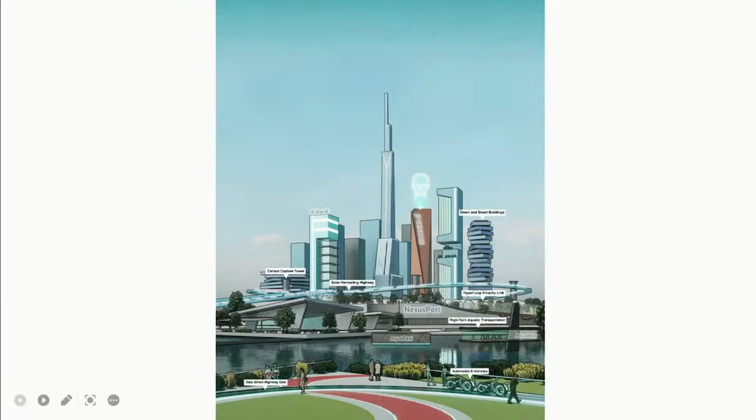Hi, good morning. My name is Jack, and I'm from UTAR, currently in my final semester of my undergraduate studies. Today I would like to present to you my idea, my vision of the future city itself. I gave my vision a name, called ASEAN Nexus, a floating city on sea, constructed mainly upon two main pillar ideas: the first is how it would operate as a city with futuristic technologies that solve today's problems.

The city itself is envisioned to float on water, mainly because of phenomena like rising sea levels. Big cities like Venice, Virginia, Shanghai, or even closer ones like Jakarta or Ho Chi Minh City are bound to sink below the rising sea level and disappear within the next few decades. The city itself would be constructed out of modular floating pods, and when combined together, they could form any size, even up to the size of a floating city, with any architecture happening upon or even below it.

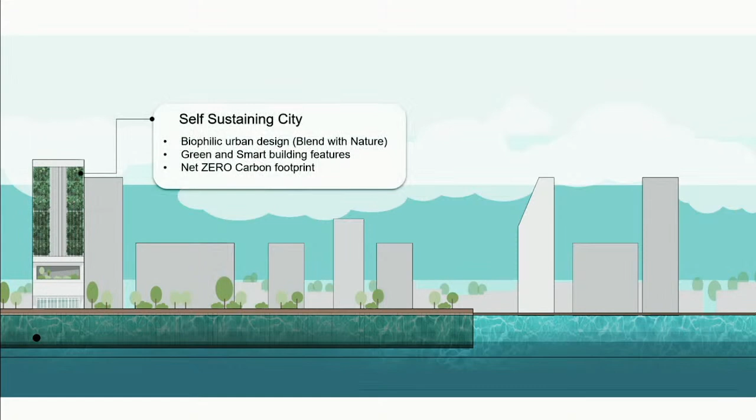The city itself would also be self-sustaining with biophilic urban design, and all the buildings will be integrated with green and smart building features. All the architecture will be not just net zero carbon, but also able to harvest rainwater, harvest solar energy, and even help purify the air pollution that we have today.

And speaking of air pollution, the city itself would also have carbon filtering towers which help lower down carbon levels. As we all know, even if we start planting the maximum number of trees today, it will still not be sufficient to combat the air pollution that we have now. Therefore, there will be these carbon filtering towers at the peaks of the city itself.

Combined with the air purifying system of the buildings, this may be one of few ways that we can slow down the global warming process.

The next big change will be electrical AI self-driving vehicles, which will all be solar or electrical powered, releasing less to no carbon emissions. Future roads and highways can be imagined as massive circuit boards where not just electrical energy but also data is transferred between the road and the vehicles, so the AI or the vehicles themselves can use the energy for traffic control.

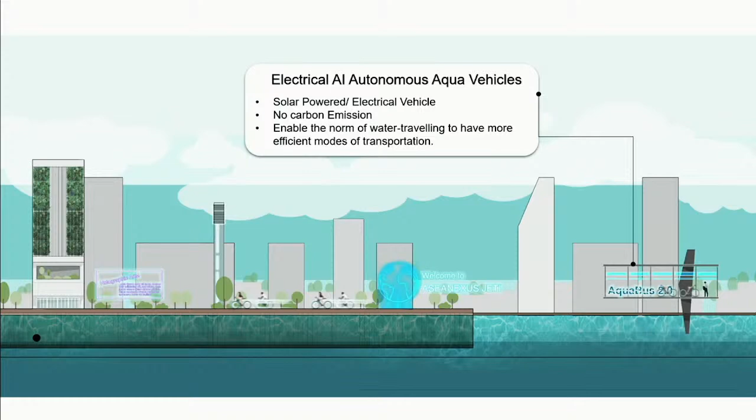The highways can also be integrated with solar panels to help harvest solar energy. The same can be said for water transport, where it will be improved to the point where it can be used as an efficient mode of transportation for the floating city itself.

Lastly is a Hyperloop system. This can be understood as the future improved MRT system, but working within a vacuum tube with less to no air friction inside, enabling maximum traveling speeds. We can use this to interlink the capital cities of each country, which brings us to my second main pillar concept of ASEAN Nexus, which is connectivity.

Industry 4.0 is witnessed through the fusion of technology and human, in which by technology I mean robotics, AI, electronics, or even cloud systems. All these blur the boundaries between our physical, digital, and biological worlds. Therefore, it is always the intangible aspects of our history, culture, and our feelings and emotions which really connects us back to what makes us human.

ASEAN Nexus, the name literally meaning the central of ASEAN. It was first envisioned to be the central trade hub for the ASEAN nations, but now it is a free city, not governed by any of the ASEAN nations. Rather, all of us share equal responsibility in growing and maintaining the city itself.

ASEAN Nexus was soon to be the showcase of our tropical climate to the world, in which the districts around it will help showcase the context and culture of the nearby land of the Malayan district, Indochina, Philippine, Borneo, and Indonesian district. All these districts will help break down the geographical limitations of countries.

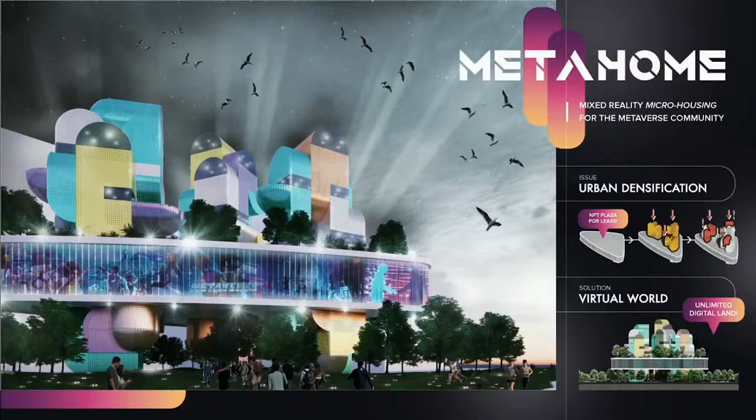So for this project, I've delved into the issue of urban densification. There are constraints in the physical world, so what if I can propose a non-physical solution to it?

People say sky is the limit, but I would say virtual world is the limit. The lack of physical spaces in densely populated urban areas could be potentially compensated by the unlimited land that we can find on the virtual land.

So the aim of the project is to nurture the consensus of phygital architecture while escalating its sustainable physical realization as a prototype, as an urban core that would realize in the physical world.

So I proudly present to you the Meta Home, the mixed reality micro-housing for the Metaverse community. Utilizing blockchain technology, the users are free to customize and personalize their own modular units.

For instance, outdoor terraces for seniors living, natural daylighting workspace for entrepreneurs, etc. So the designs are reviewed online by the owner himself before translating into a physical asset.

Also, the Meta Home is equipped with the flexibility for future expandability. The Meta Home has the capability to cater to the changing needs of the users at different ages with different desires and different demands.

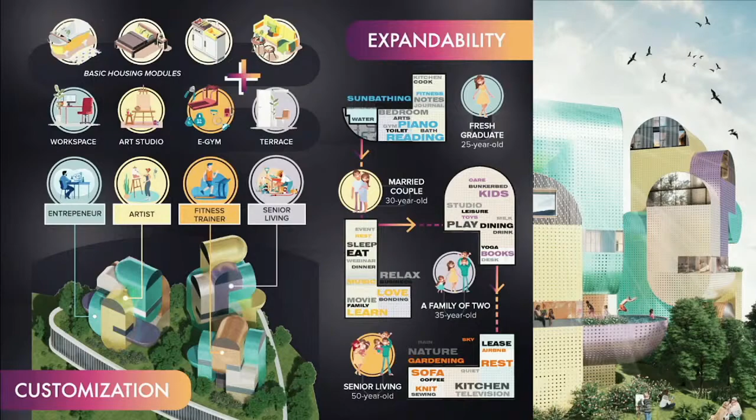Again, I believe that cities shouldn't happen to people. People should be involved in the creation. So in the Meta Home, micro-housing will no longer be stacked in repetition. It will be expressive with the highlight of collective creativity of the community living here.

So everything we do online today, connecting socially, meetings, Zoom, everything, entertainment, is going to be more vivid and immersive. This is what Meta Home is working towards, the social presence. The reality presence is the key to feel connected in the Metaverse.

There are diverse digital amenities provided in the Meta Home, the NFT Plaza, the DeFi Arena, and so on. And also, many companies have already taken a step ahead to launch their products in the Metaverse platform.

For example, the cosmetic company NARS has already launched a makeup NFT campaign, and also Decentraland, a virtual 3D world where people can buy and sell digital real estate, hosted the world's first ever Decentraland Metaverse Marathon.

So I believe that it has the ultimate potential to unlock a massively greater creative digital economy.

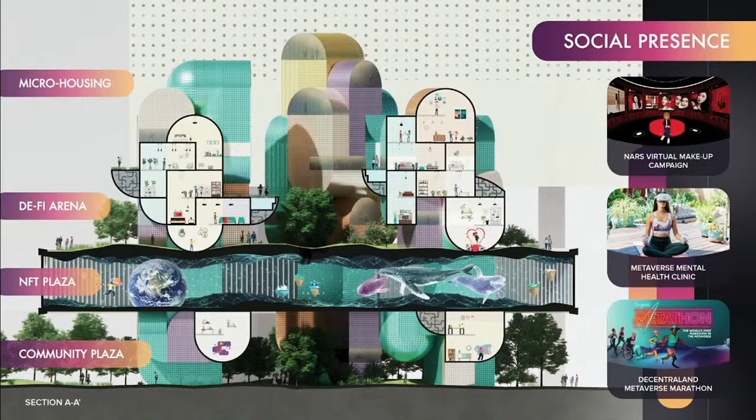How do I play the video? Yes, okay.

So I imagine Meta Home as a vivid lifelikeliness. It is personified, and also it's breathing in its significance of social responses. It's envisioned as a prototype that will replicate in different areas at different cities where city lives intensify. It is infused with social responsibility.

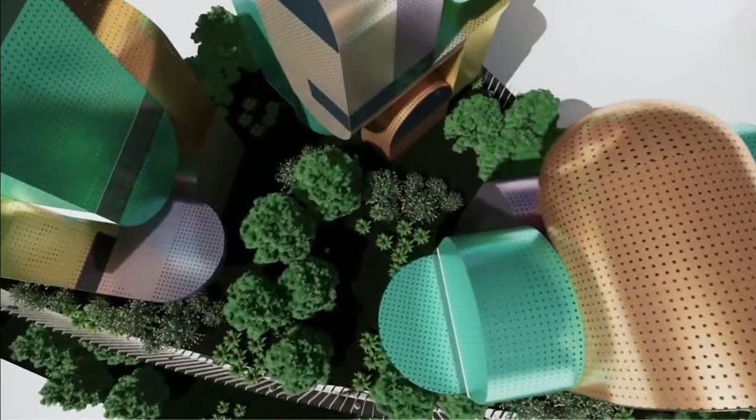As a social agent that will showcase to the world what a Meta Home is and the infinite possibility that Meta Home is endowed with. Meta comes from the Greek word beyond, and future city is beyond what we can imagine. So I would say, step forward, step beyond the Meta Home, the beginning of the next chapter of the future city. With this, thank you.

Thank you. Wow, this is so exciting. I don't think I can do a video presentation like that with my skill. Wow, generation now is so different.

Right, so for the judges, Architect Carol Lee, I think you're ready. Yeah, go ahead. I'm already excited to ask questions because of the ambitious vision that you have. Congratulations.

Thank you. I do think it's amazing that you have the metaverse in mind. My question is this: I saw that you highlighted mental health, and I'm glad you did, that mental health is one of the things you pay attention to addressing. But what about the physical health? Because in the metaverse, it's virtual. The challenge is, how do you become the architect of the physical world in a virtual world? Meaning, how do you facilitate things like sun, nature, oxygen density, which you can only have in the physical world, but how do you facilitate that in the virtual world to enable physical health?

So again, this ties back to the physical issue I mentioned earlier, the scarcity of land in the physical world. The reason why I propose micro housing is to address the lack of land in the physical world. So my proposal would be, within that small 30 square meter of micro housing, what I can propose is the virtual reality gives them the space. For example, some clients might have sickness or mental issues with small and congested spaces, so virtual reality is giving them other options to have, let's say, a high ceiling.

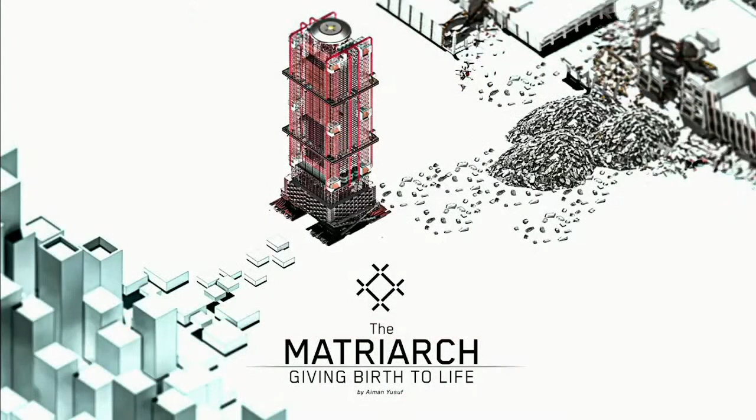As I woke up in the morning last year, I watched my smartphone and saw the news. There were so many catastrophic events happening at that time: the Tonga volcanic eruption, super typhoon in the Philippines, the Sumatra earthquake, even the current Ukrainian-Russian conflict. I noticed one thing appeared, which is the aftermath that resulted in catastrophic debris such as metals, woods, plastics, even cement, that somehow grows within these disastrous areas. So we begin to ponder that these things are not seen as valuable resources, but as an old saying goes, another man's trash is another man's treasure.

So I begin to ponder whether this can become a valuable resource, as stated by Neri Oxman, an architect, saying that the future of architecture is the materials that surround us. She says that by 2050, wastage on our earth will expand by 60%. So this calls for new ways to look at this debris as a new dimension, and to help those rebuild their lives or what they lost based on the remnants of the events.

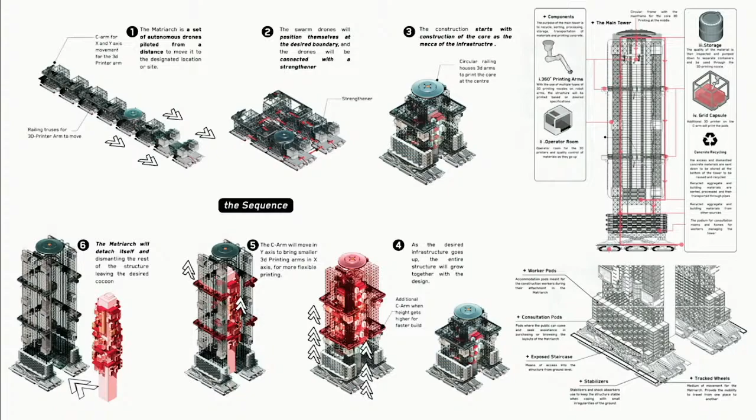Then the Matriarchs will start to build and install another C-arm for the x-axis to build, as the circular motion will go for the x-axis. So it starts to build at the desired height, and during the fifth stage, the resident will inhabit the constructed building as the construction completes. But during the last stage, the Matriarch will release the building, as if a mother giving birth to life.

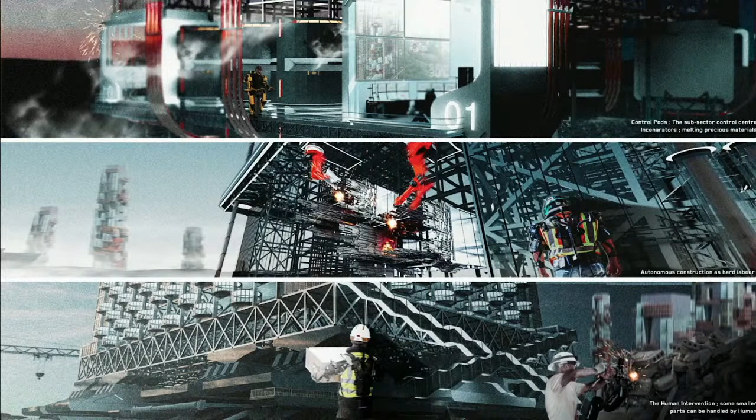With the coming age of big data and artificial intelligence becoming machine learning, we are moving towards singularity with AI as the alpha decision maker, and us as the controller, the omega decision maker, deciding what's best for our suitable environment. The first image illustrates that the future operator will only operate and manage the Matriarch and the integrity of the designs. The second image illustrates how robotics and autonomous systems become the hard labor, while we just look and decide what's best during the process. The third image shows human intervention, that we shall cope together with the AI and the machines. This begins to make us ponder the future of human and machine integrity together.

So we will decide the future of humanity. As architects and future designers, we ask: even by 2100, will we see a self-sustaining, self-regenerating city that contributes to our own life? We will become the guideline, and we ourselves will live together amongst the machines. So where the Matriarchs go, there will be life. I will end my slides and my speech here with a video that we shall ponder and wonder about the future together.

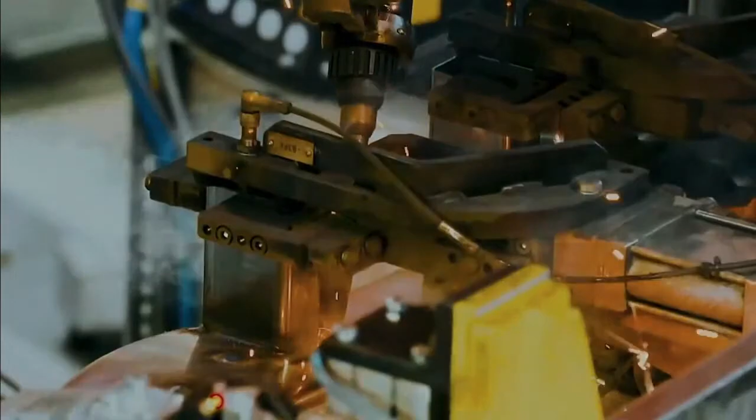With that, I end my presentation. Thank you.

Firdaus, you really bring us to your future, and somehow or other, we become scared. Because this is one prediction saying that if people never realize how to take care of our nature, especially Mother Earth, this thing could happen. Everything is being polluted. And this is another angle - well, this is not like a studio crit session, because this is Architalent. That's why I consider this your talent to bring us to the future, especially to the theme of future city. I have to give you thumbs up, well done, thank you.

Congratulations. I am very impressed by your proposition, and while it is set in the future, I find it very doable. So congratulations, thank you.

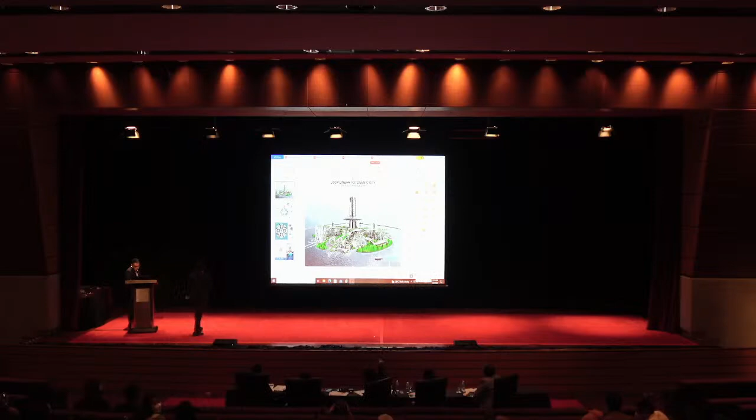Cannot work. Kid, you handle the PowerPoint or behind? This one? Oh, okay. Yes, it. I think we have a technical glitch here, right?

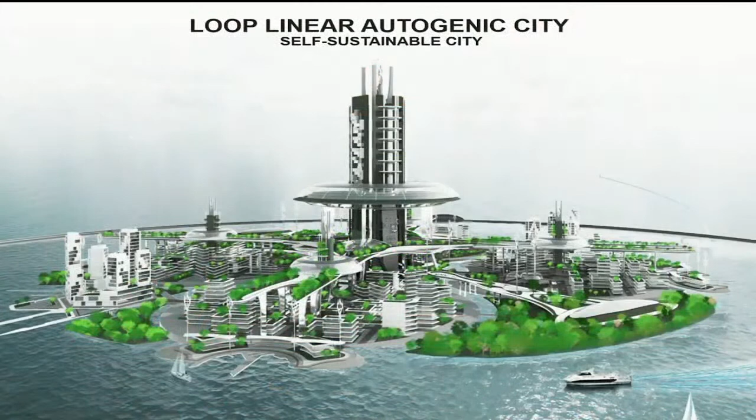What I imagine in the loop linear autogenic city is actually a floating city that utilizes renewable resource energy, and then it powers up the entire city. So the loop linear autogenic city is actually to counter the issue of rising sea level and also the rapid urbanization within the coastal area. And then what I'm trying to do is create man-made ecosystems that can benefit human beings.

So in terms of the master plan concept, there's a grid city and a linear city applied for flexibility in expanding in the future, and then there's a loop city element that gives flexibility in terms of neighborhood or citizen roaming, looping in the city. Another issue that I want to mention is the traffic issue, which is a major issue we're facing now, and that's why the loop linear autogenic city is all about.

It's a looping city. There's an elevated multi-level electrical circulation, which you can see there. There's an electric car that will roam into the district, and on top of that there's a hyperloop train that will bring you from the district to the downtown of the city. From the downtown city, there's a passenger drone that will bring you up on top of the city, vertically circulating, and you can see that the service drone will serve as monitoring the entire city in terms of security and all the facilities.

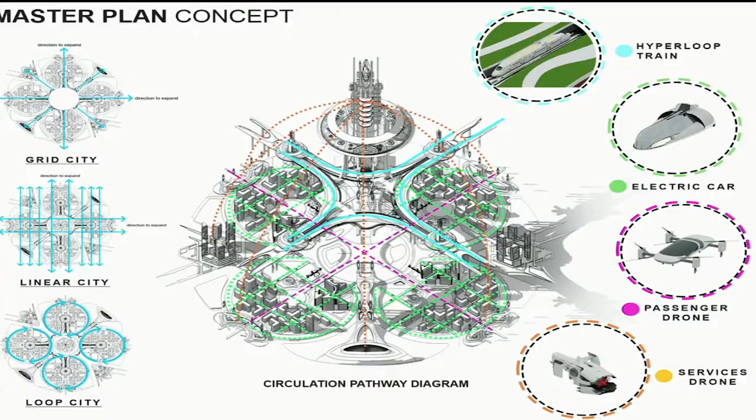So what I'm trying to aim for is free flow circulation, with minimum intersection between the roads, so that we can utilize the transportation better, given the limitation on renewable energy. Okay, next.

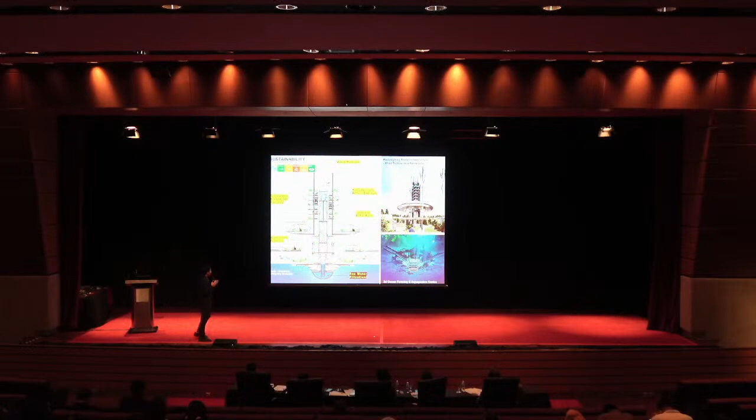Another thing I want to highlight is the main idea of sustainability. This image shows the core of the entire city. This core will power up the entire city. The sea filter will manipulate natural elements into clean energy through seawater filtration. We will filter and store it for various uses, and on the other side there's a waterfall — the seawater becomes a man-made waterfall, and through the waterfall elements, we can generate electricity.

Another component is the concave BIPV roofs, and at the top of the development, wind turbines take advantage of the ocean's wind velocity. Next, I will play the video.

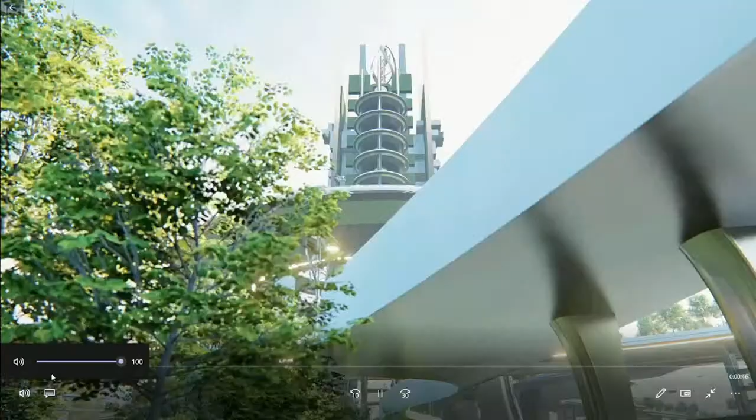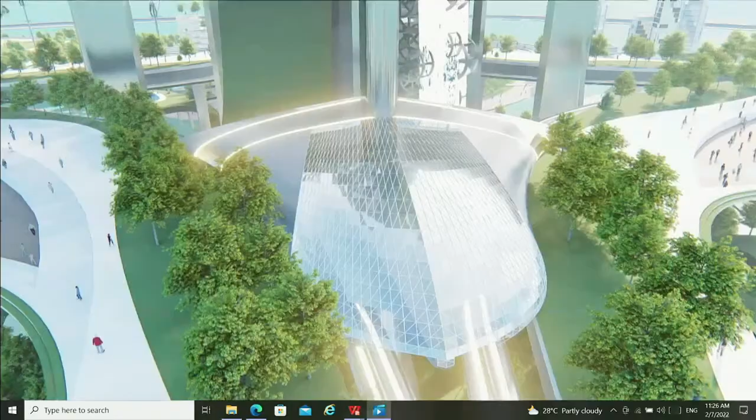The city is aiming for future extension. The Hyperloop station will connect all the city, so all facilities will be connected by the Hyperloop station. At the edges of every district and the city, there's a public ramp for citizens to roam, and the district tower acts as a connection between the Hyperloop station from the center to every district.

This one is about the waterfall wheels. Yeah, this can be modular, and it will be explained in the future. Thank you, that's all.

Thank you, Firdaus from USM. Yes judges, I would love to live in your city. Yeah, I can do it with lesser traffic jams. Yeah, and waterfalls — that's what we aim about.

It's a beautiful city, and also a beautiful presentation. I really appreciate the diagrams and visuals you've brought for the audience to enjoy. I have only one thing — you talk a lot about interconnectivity, and that's really efficient, very systematic. I like your master planning, where you have linear, grid, and looping. So what about the water vehicles? Is that part of your master plan?

Yeah, it's also part of the design. I saw some renders, yeah. It would be more interesting if their daily life also revolves around the water vehicles as well. Can I go back to the slide? Yeah, sure, okay.

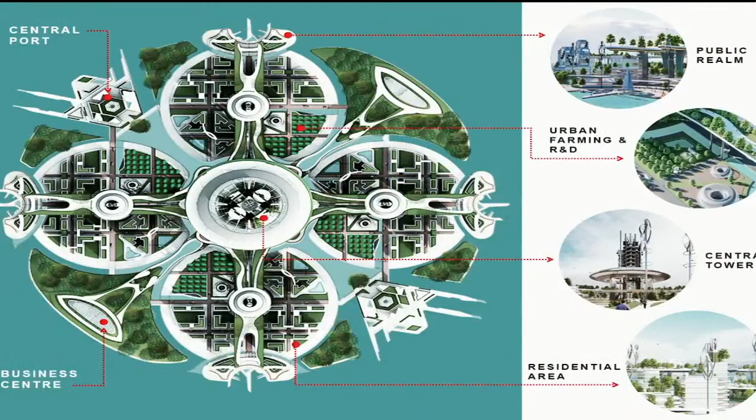As you can see, there's a port and business center at the top edges. If the modular city will expand, there are two ways connecting the entire city — one is the Hyperloop station, the railway, and the second is the central port. This one is for maritime transportation.

Firdaus, congratulations. Yeah, thank you. I like your presentation, very good.

My general assessment of your work is that it is very utopian, but you have greatly considered the natural environment, which is highly commendable, because in the future, even in the most futuristic way, we should not forget the environment. So congratulations. Thank you.

Hi Firdaus, again I want to congratulate you. Very, very good presentation, and I think you captured even the master planning aspects, like what Architect Carol mentioned in terms of master planning. My question is, are you building this at the sea, or are we just building it? Oh, suddenly it's 'we'.

Or are you building it just after the coastline, expanding the current Peninsula Malaysia? So it's reducing due to the sea. Are you then supplementing it back with these modules? To answer that, it can be anywhere as long as it's sea, but the depth has to be reasonable to build that.

You can listen to the cries for help - they are dying to be revitalized and to be functional again. Hence, the concept for my proposal is symbiosis, a mutual relationship between different organisms, old and new, past and future. Such a concept is to highlight and bring the green elements all the way to the rooftop of the building. It wraps around the building all the way to the rooftop, bringing active circulation and a multitude of green spaces to help the occupants and the local neighborhoods.

And the green spine is also able to captivate and cultivate its own ecosystem where you can grow your own food, have good landscaping at each level, hit the gym, and be able to work at the same place. Being in the post-pandemic phase, it somehow makes me realize the importance of living and working at the same place.

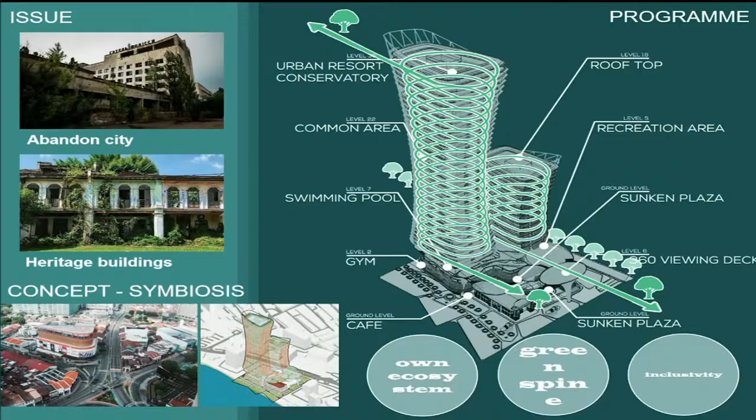So next is the city heartbeat. It actually makes me redefine this concept where the scheme acts as a heartbeat, where it beats, grows, cultivates and revitalizes all those existing buildings surrounding it. It's like a ripple effect that helps uplift and bring all those kinds of buildings all the way to this scheme.

Okay, moving on to the perspective on my right-hand side is the xylem pod, one of the innovations proposed along the coastline. It gives out cooling breeze, the same concept as the cooling slab system to help with the thermal comfort of users, and a cluster of them exponentially increases the cooling potential and reduces the heat island effect. The second image is the facade of the podium, inclusive of both LED and BIPV panels.

Other than generating revenue from advertisement, they can also generate their own electricity. A bit to the left-hand side is a parametric structure made from fiberglass reinforced concrete to hold the glass panels, and this whole system is like a funnel that collects and channels rainwater for irrigation purposes. This whole sustainable ecosystem tower is to influence and make change for the betterment of the future. Next, I will show a presentation video of mine.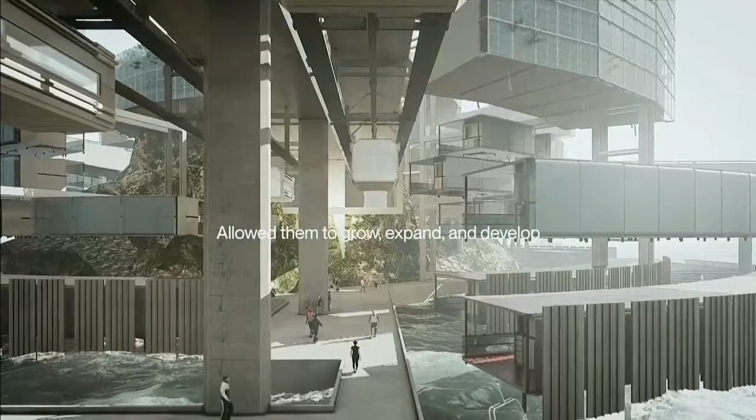Thank you, everyone. I would like to introduce myself. I am Rizky Rivaldi from Universitas Indonesia, and I would like to present my design, called Harbourage of Hope.

I am calling out the issue about creating the future city. It is about the phenomenon of refugee migration, and about refugees getting to several countries or big cities for their growth and development life.

I take the sample of Hong Kong. Hong Kong is a big city with 6,000 people per square kilometer. So in some ways Hong Kong has a lack of space and a problem to develop their future city. Refugees often get citizenship rejection from the mainland, and the mainland has another problem too, that it's a highly dense populated city. How can it be solved?

I'm responding to this issue by forming an outside stone reef for the wall, and finding an unimaginable place for the building I built, to expand the human potential for the lack of spaces. In the massing process, I took up...

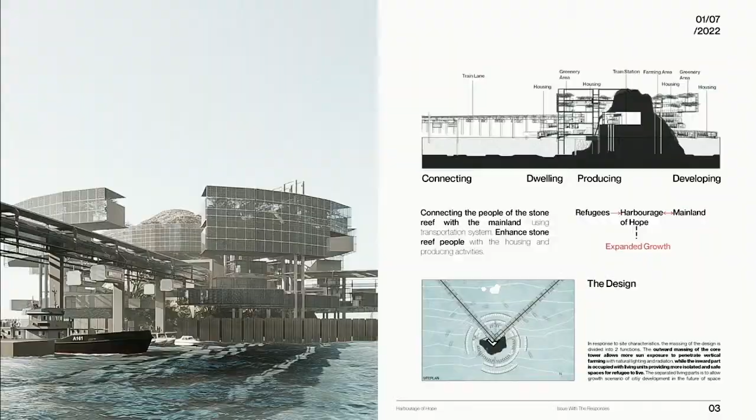This is the model, and I split it into several programs. The first one is the greenery area. The greenery area is an aspect of building sustainability and becomes a food supply output from the building. The greenery area also has rainwater harvesting for its water supply needs.

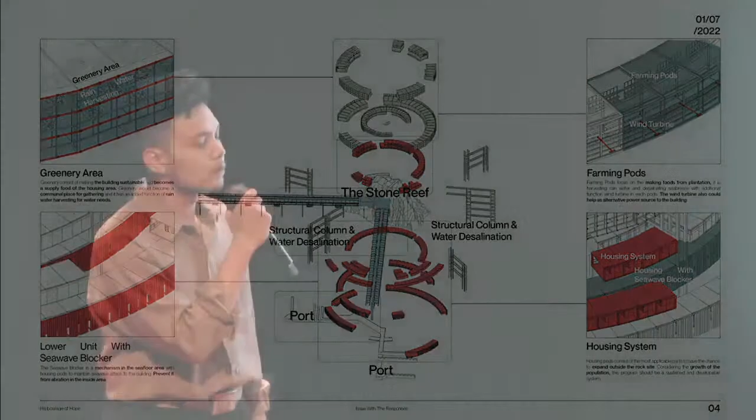The next one is farming pods, which is about making food for supply. The farming pods have a wind turbine for electricity needs.

The next one is the housing system, which, as I said before, has a growing system of housing units, with the lower unit having a seawave blocker.

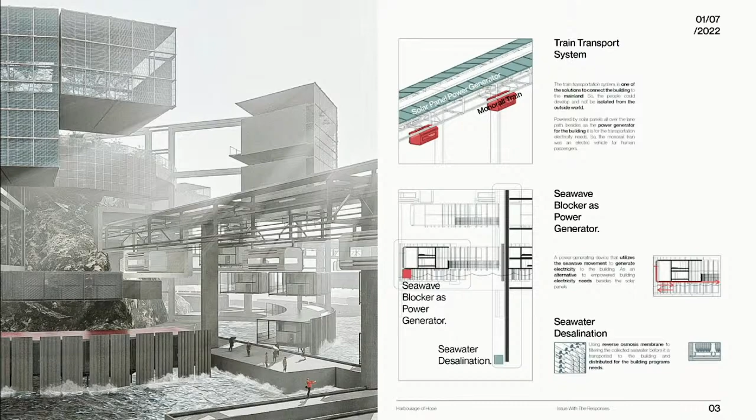The next one is the transport system, which becomes the connector between the refugees and the mainland. The transport system is powered by solar panels.

The next one is the sea wave blocker as a power generator, which utilizes the sea wave movement to generate alternative power for the building. The seawater desalination supplies freshwater needs, using a reverse osmosis membrane to filter seawater and fulfill the building's program needs.

Okay, thank you all. That's all for my presentation. Assalamualaikum warahmatullahi wabarakatuh.

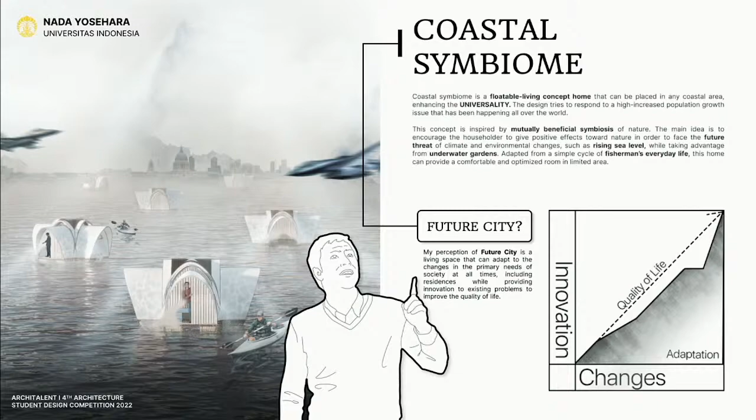Before I go to the issue and statement, I want to share my perception about the future city. As you can see in the pictures, there are two words I want to highlight: innovation and changes. These two words collaboratively will improve and increase the quality of life.

Then there is one more important thing: within the process there is adaptation. So for me, the future city is when the design can adapt to changes and give its best innovations to face the future.

From the issue of population growth, today the explosion of building erection vertically as a solution for uncontrollable population growth is no longer an effective way, due to it having a limit, while population growth currently still increases.

So the statement is: we must realize that a site is not only about the ground and stone, but a site includes the oceans. So why don't we try to transform vertical living into horizontal living?

Based on data, the surface covered by oceans on Earth takes 70%, which means we have a big possibility to transform vertical into horizontal living, since it has unlimited living space.

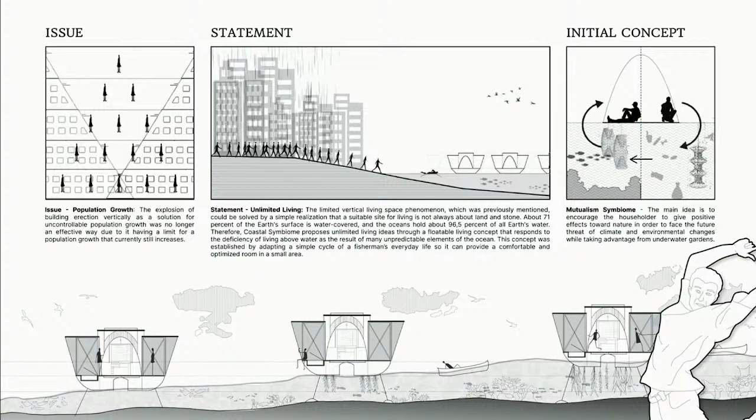The initial concept I propose is mutualism symbiome, and the main idea is to encourage the householder to give positive effects towards nature in order to face the future threat of climate and environmental changes, while taking advantage from the underwater gardens.

So we not only take advantage from the oceans, we must also give positive effects to the oceans. That's why it's called symbiosis mutualism.

For the digital shape expression, I utilized digital shape exploration scripting, producing several digital shape explorations, and I decided to choose the cross-shaped form, which I think best fits the five design goals I obtained.

The first goal is reflecting fisherman's dwelling humility, second is seamless compact geometry, third is balanced weight for stability, fourth is centered spatial organization, and fifth is grouping crossing between living and surfaces.

Once we finally decided on the final form, I imagined how it could be transformed into the urban context. This design allows your own preference, meaning it has its best modularity.

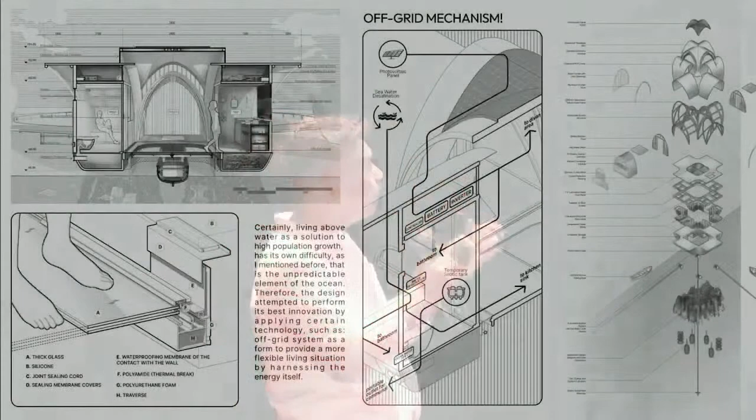Also above the boat, I implement a transparent floor that may allow the householder to see the underwater garden that I designed.

Since this design is far separated from the mainland, I implement an off-grid mechanism where the main power comes from the photovoltaic panel, harnessing energy from the sun.

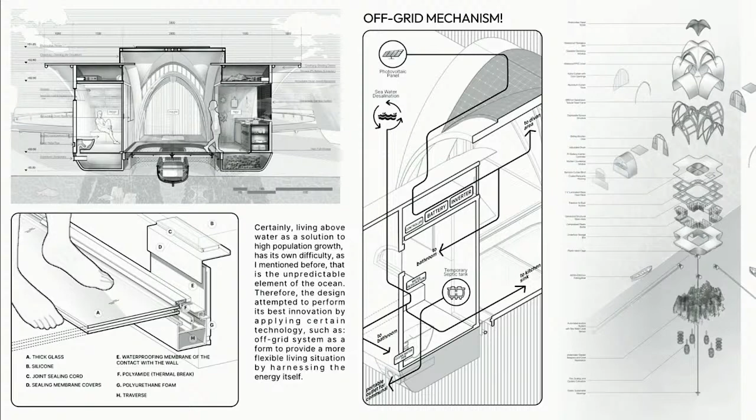This is the process of the off-grid mechanism, and there are several technologies that support it.

For the conclusion, with the presence of this design, it is hoped that you will no longer be afraid to face unpredictable future threats, because all problems have been answered through the innovation that I provide. Therefore, this design will be one of the top solutions in facing the future, especially the rising sea level threat.

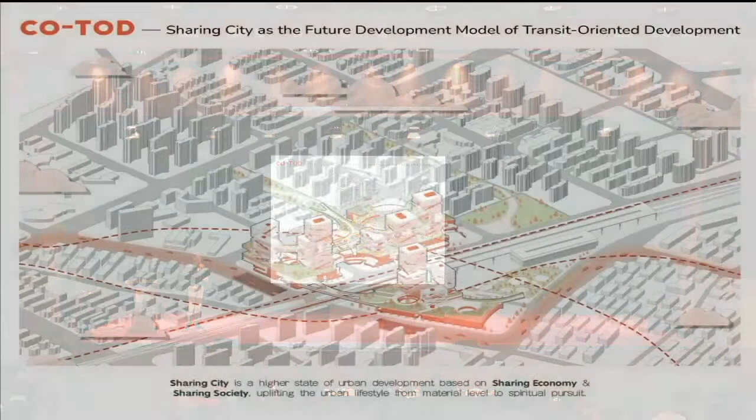Good morning. My imagination of a future city is a city with flexible, borderless living and working. This can be achieved with the idea of sharing city. Sharing city is a higher state of urban development based on sharing economy and sharing society, where people aim for quality experience of using instant services when needed rather than owning something that will only be used at certain times. To achieve this, a city has to fulfill 3 fundamental criteria.

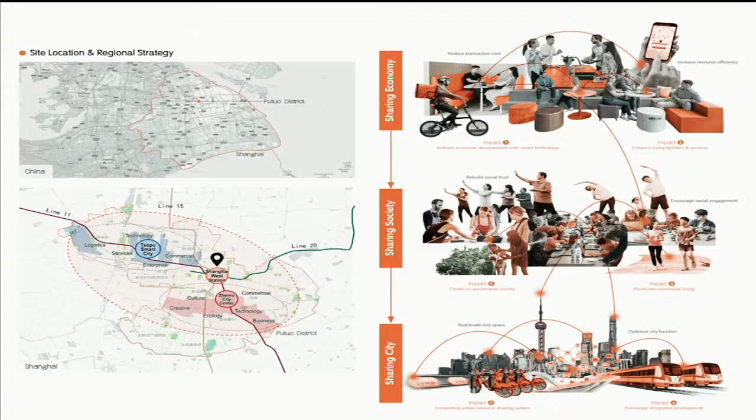My site is located at Shanghai West Station in Putuo District, between Taopu Smart City and Zhenru City Center. The future development plan of Taopu and Zhenru will introduce numerous resources in innovative technology and modern commerce, fulfilling 2 of the criteria of a sharing city: high-level development of productivity and matured application of intelligent technology. To achieve the 3rd criteria - normalizing the culture of sharing - I propose Co-TOD at Shanghai West Station, a transit-oriented development project with the idea of sharing city.

Sharing is a model embraced in China due to the dense population and limited resources. Sharing economies such as e-commerce, co-living, co-working, and online platforms utilize smart technology to boost economic development and improve living facilities and services. When more people are used to the sharing platform, a sharing society will be formed where people take care of and manage their community together and adapt into a communal lifestyle. When more people adapt into this sharing lifestyle, a sharing city will be formed with a comprehensive urban resource sharing system.

So I studied different levels of sharing, from city scale to building scale. Firstly, sharing between cities by creating connection between Taopu and Zhenru, forming a technological corridor through the vehicular road and railway system, connecting both cities to Shanghai West Station. Shanghai West Station, which is my site, will facilitate the exchange between both cities by providing flexible living and working areas. To further enhance the connection between the cities, I propose a transport system for sharing between people and goods.

The railway coaches can be swapped between passenger coach and goods coach depending on peak hour and non-peak hour, using a capsule pipeline to deliver parcels directly to and from the mall, co-living and co-working spaces.

Next, the scheme is also shared with the surrounding community. The activity created within the scheme can benefit and improve the life quality of the surrounding neighborhood by providing spaces for leisure, cultural, sports and daily needs. An underground interchange ring is also created with a roof garden to connect the northern and southern areas of the site, which is currently disconnected by the railway track.

Thirdly, between different building blocks, there's also sharing between programs. Co-living and co-working towers are built along the railway station with an experiential mall to supply the daily needs of residents. However, co-living, co-working, and experiential mall all share certain similar functions such as event space and leisure space, and this activity can stimulate one another and activate the urban space. So I create an urban core with multipurpose atrium that connects underground spaces and upper level spaces, and also provides linkage with shared facilities among different programs.

Lastly, within each building block, there is also sharing between functions by creating multifunctional combinations and blurring the boundary in between to encourage interaction, and also providing space-time flexible usage.

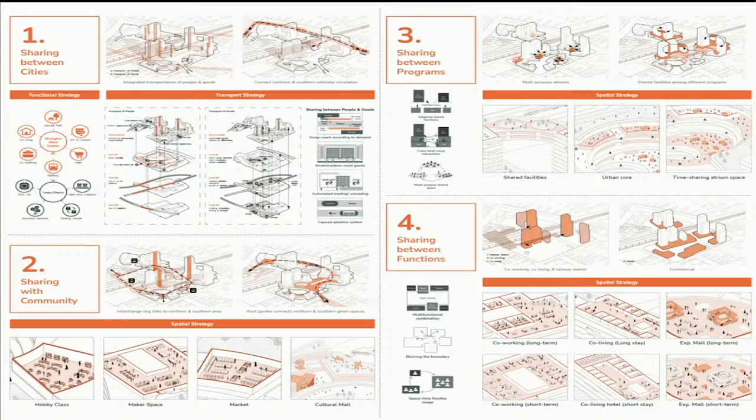So co-living, co-working, and experiential mall can all be rented long-term or short-term depending on the user. Different levels of sharing all work together to create a sharing city that is viable for different scales of users.

For on-site residents, they will be staying long-term. The co-working space, co-living space, and link bridge with shared facilities create a sharing lifestyle that allows them to enjoy greater experience and lower cost.

As for the surrounding community, they can participate in the makerspace of co-working, the hobby class of co-living, the community market along the mall, and the cultural mall transformed from the heritage building. All of these are connected to the roof garden, which is accessible to the public.

As for visitors from other cities, the scheme provides them a flexible and temporary office working space and accommodation, and also an underground mall as soon as they arrive at the railway station.

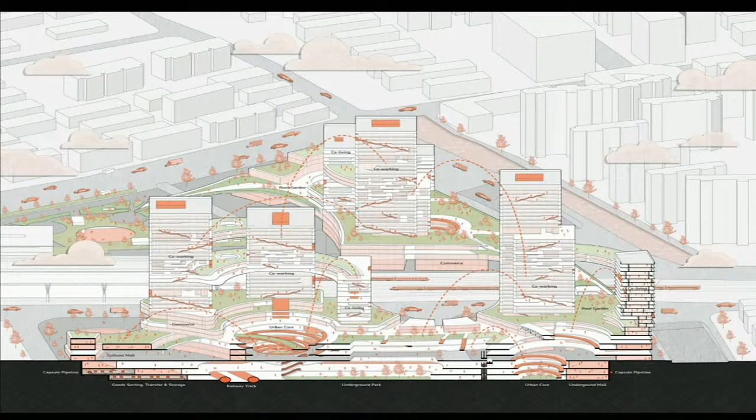To sum up, from higher to lower levels, people share working and living space, facilities, the recreational park, public transportation, and the delivery system. So the railway interchange station is always well connected to other cities.

Hence, the idea of a sharing city can be implemented here using the already available resources. In this scheme, people do not need to own a car, a house, or work at a fixed location anymore, but still be able to enjoy a great experience of quality services whenever and wherever they want. Thank you.

Zianlun, congratulations, you bring me to Shanghai now. So is this your first international session? I'm actually from Malaysia, just studying there. So this is your first time presenting at an international level? Yes. Congratulations, you have done a good job here. You know what I mean? So I'll leave the design comments to others, but for me, you show that you have experience working in China. And then you come here—are you working in China now? No, studying in China. Okay, then I hope you can work there and bring back to Malaysia and share with all future architects here what your experience in China is. I wish you all the best, and I'm so proud of you. Congratulations.

Zien Lun, right? Yes. I really think that 5 minutes is just not enough. I felt that you could go on, there's so much to unpack in this holistic scheme. Even looking at this picture alone, I'm still digesting the many things you have put into it. It's a very complex yet comprehensive approach to your design, and I really enjoy just looking at this—it's like a piece of art too. So I do think this is very feasible, very practical, and very organized. I love it, that's all, I have no questions for you. Thank you.

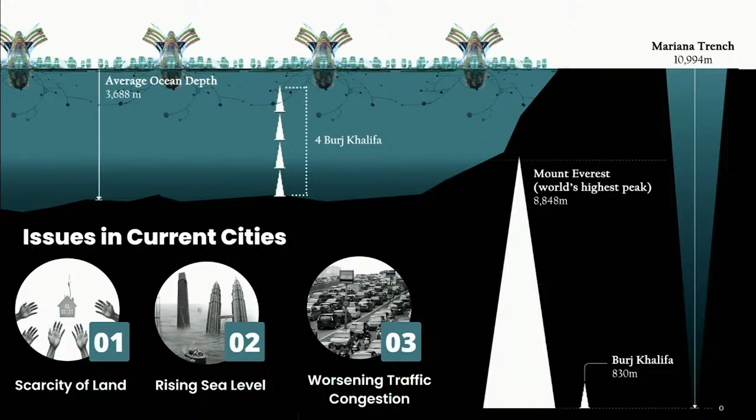Imagine how tremendous the spaces we could create if we explore ocean architecture. This certainly solves the issue that happens in every city, the scarcity of land. Next, the design concept of my aquascraper scheme is the hyperlink city, where the city center acts as the heart of the aquascraper modules, surrounded by sub-cities, and finally the perimeter residential belt. Each module is connected by the hyperlink to form a series of floating cities. This decentralized, or scattered city center concept, brings numerous benefits: it maintains land prices, reduces commute time, and makes Aqua City a walkable community, bringing all facilities to your doorstep.

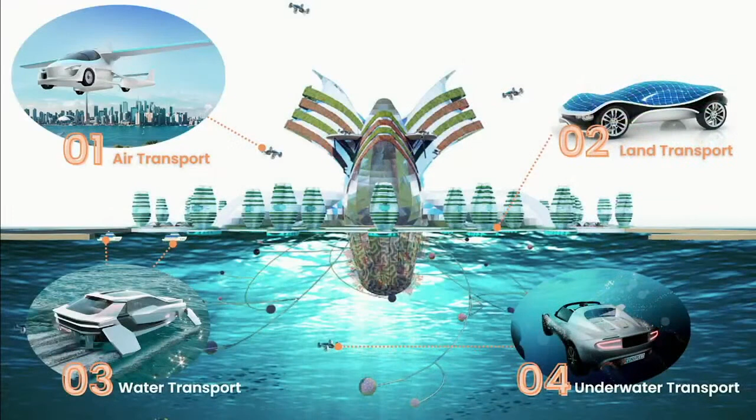The Aqua City provides 4 layers of transportation: the air layer conquered by flying cars, solar-powered green self-driving cars on roads, futuristic high-speed water buses on the water, and finally humans realizing the dream of commuting underwater with submersible vehicles. Now let's enjoy the animation.

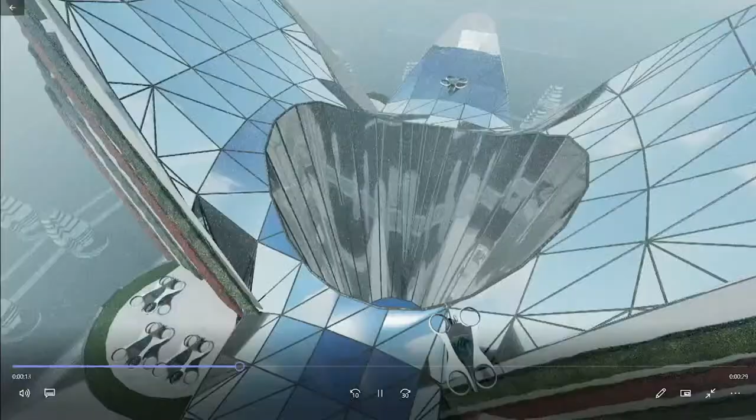Allow me to walk you through this self-sustained city where floating solar farms are proposed in every module to power the city. The central atrium will harvest both rainwater and daylight down to the structures under the sea. Vertical farming is proposed to enable food independence in every one of these aquascraper modules.

Moving down to the sea, tentacle-like structures convert the kinetic energy of the water current into electricity. And let's not forget our future neighbors, the marine ecosystem, where artificial coral reef facades are installed to revitalize the marine ecosystem. That's all from me, and I guess now you're excited to move into this aquascraper. Thank you.

Yiling, wow, you make our day. I hope CIS can start to appoint you as a good presenter. Datuk Vincent is here — thank you, Datuk, welcome. I'm so proud of you because you managed to present so well. I need to declare the verbal presentation full marks, because the way you narrated, your design — I think this is the point that convinces your lecturers, convinces your clients in future. Very good, and the way you made your presentation informative with illustration — well done. I wish you all the best in the future, you are truly, truly potential. All the best, thank you everyone.

Look at my design strategy, which makes use of urban public space, building, transit and transportation, sustainable water, waste, and energy. All this strategy helps me study my urban planning in terms of having an industrial site here.

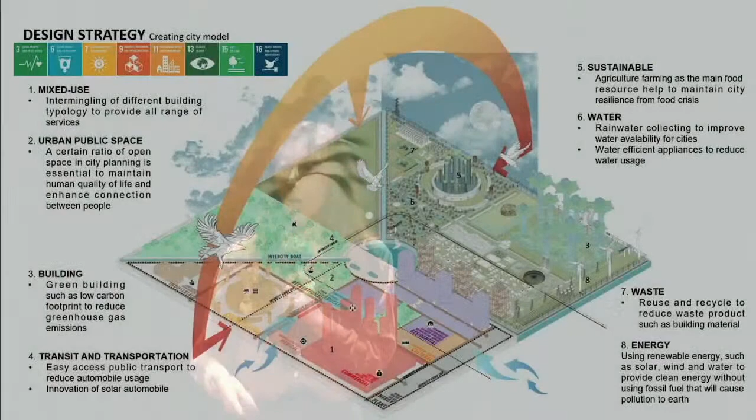Ranging from industrial site, medical, government institutional building, housing such as landed housing as well as high-rise tower, as well as commercial - I have shop lots, shopping mall, as well as office tower - and finally, culture and urban space.

Perhaps we can look at the video to show my imagination view - a hero image within the city area, and an isometric diagram to show my design idea in 6 different locations.

For the residential tower, I'm looking at a link bridge for community engagement, modular housing units, and flexibility for assembly, as well as an office tower with accessible green roof space.

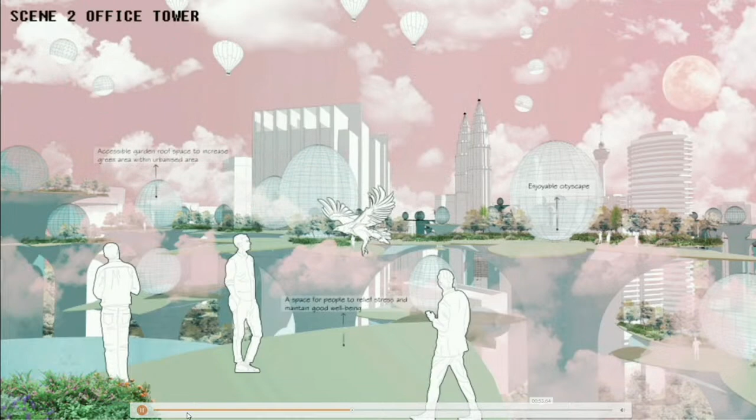A pavilion encouraging social interaction as well as increased income. A riding cable car, from here you can see that the nature area and man-made structures are in balance, as well as urban parking space. I have a rainwater collection system for rainwater absorption and an automobile-free pedestrian walkway. Finally, a mobile classroom, free to assemble, integrated education, and encouraging outdoor classrooms.

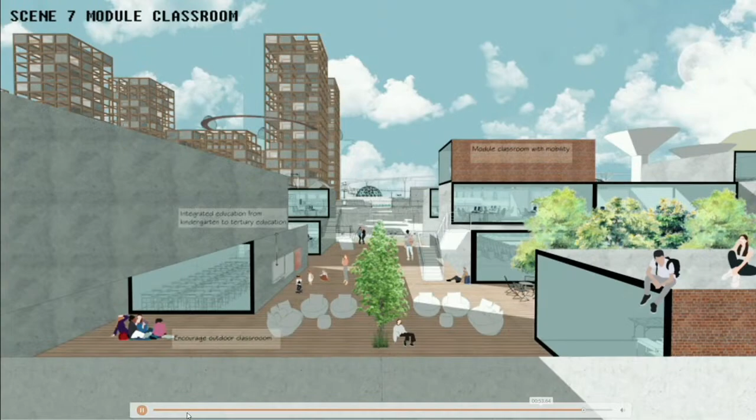A collage perspective, and it ends my presentation. Thank you all.

Wow, Zhizheng, you named yourself just now? Can you call me Wendy? Wendy, okay, yes, Wendy.

I can tell you, Wendy, with a colorful presentation, you have shown your talent, not only your verbal presentation, but with your software and your intellectual ideas about your future cities. I think you are truly potential. Keep it up, good job.

For me, everyone's happy with all the finalists, 10 finalists. Yeah, they are truly talented. They are future architects presenting the future city. Wendy, you make my day. Well done. Thank you, you made my day also.

Wendy, I really enjoy your presentation, also because I think you have a sense of humor that I really like. Aside from that, I like the term solar punk. It's really something refreshing, something we don't hear, quite radical. Keep pushing your new ideas forward. I don't have any questions, but good job.

Hi Wendy, congratulations, it's a very nice presentation. What I like most about it is you are ensuring that nature will coexist with your kind of architecture. It's something, just like the other presenter, that's very important, that we do not forget that we base our architecture from nature, from the natural environment. Utilizing solar into your main proposition is really highly commendable. Okay, so congratulations, Wendy.

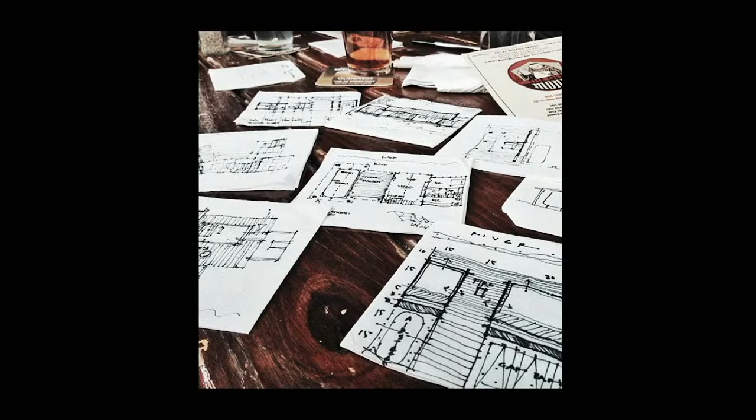And I can tell you, we are dream makers, because we create people's dreams come true. After looking at our process, the journey from our sketch, our drawings, the process, this is the beautiful part. When you start to look back on the chronology, when you pass from design stage, remember you guys, you sketch your design, and then you transfer your design into the drawings, calculation, dimensions, and then sometimes we feel failure. You feel frustrated. That's very normal, my dear students, because architecture is about rejection. But you move on. Come back to your paper, sketch on.

But sooner or later you realize that all the calculations, the dimensions, the function of the space, then you start to transfer it into your softwares. I think this is the one where you can feel how you could portray all your gadgets into your design, sitting in office or sitting in your studios. You know what I mean?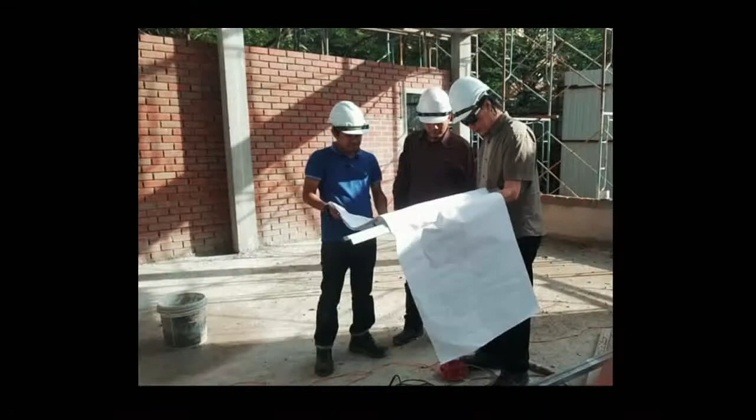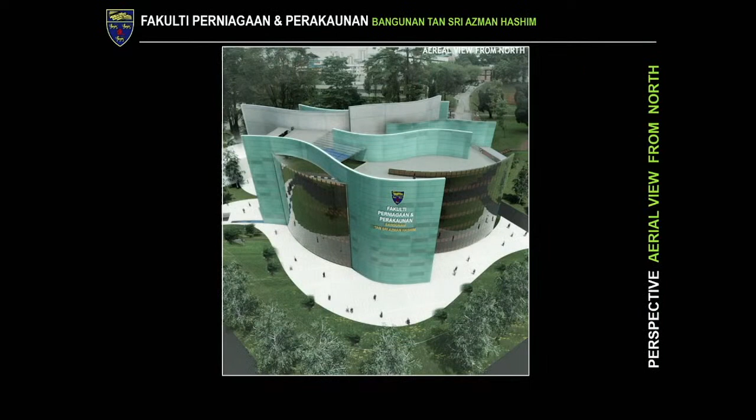You could say seek for the adventures, because you have to remember the drawings that you make, the design you sketch before, and you transfer it into your working drawings, or maybe Revit or whatever, to become scale 1:1. So there's another episode to explore when you're on-site, how to implement it into scale 1:1. So the way how you communicate with people, actually, it's not about the challenge of your design, your drawings, but it's about how to deal with people, and then how you want to present to your clients your own illustration to transform it into reality.

And become reality. You tell your clients that this is the dream that you want to make become reality. And when we come to the site, during construction, implementation, and you make it into scale 1:1.

Can you imagine the moment you create a space for people, and once people start to smile and appreciate the space that you created for them with happiness and a healthy condition, you have achieved a satisfaction value. This is the one, when I stand in front of my building, when I saw my clients, my end users smiling, all architects are looking for this magical moment, the value of satisfaction. It is a beautiful thing when a career and a passion come together.

So you ask yourself back, in this journey towards the future, come with your passion. So life as architecture students, well, I understand, because I was a student before. I know 4 o'clock in the morning is still fresh for us. And you feel so jealous of your other students studying business or law, who are still dreaming at midnight, but you're still working on it. But that's your dream.

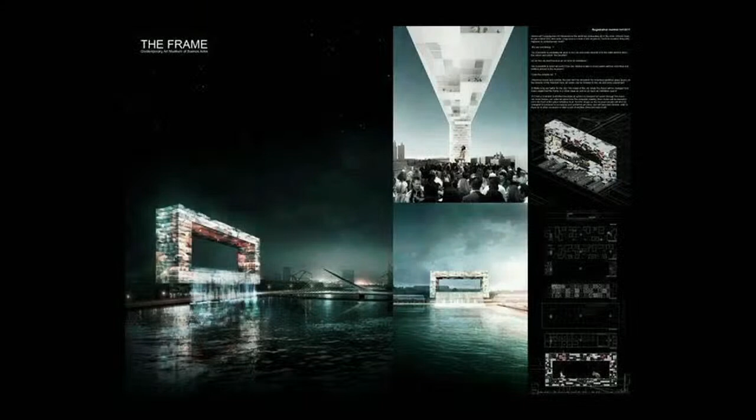For example, with those presentations, you have to define what your killer drawings are. Not killing drawings, killer drawings. And how you organize your information, do your sections, do your illustrations. It doesn't mean you put everything inside, but make priority with your information to deal with your presentation board, especially your slide presentation, fully informative, impressive, and illustrative.

So learn from here. This is one of my boards, my design scheme. Sometimes a simple illustration with simple notes will make a touch for people to understand your design, and then sell your design, and people buy your design.

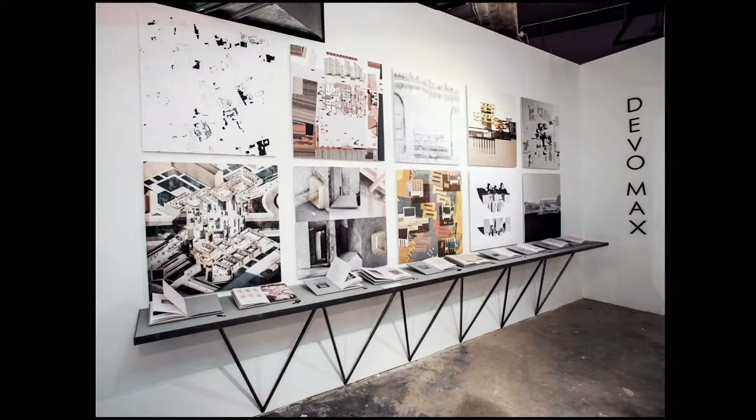So my formula to all of you is KISS: keep it simple and straight. Make it precise when you want to do your presentation board, when you want to present to your lecturers. This is the stage for you. Make a beautiful and appropriate presentation wall about yourself.

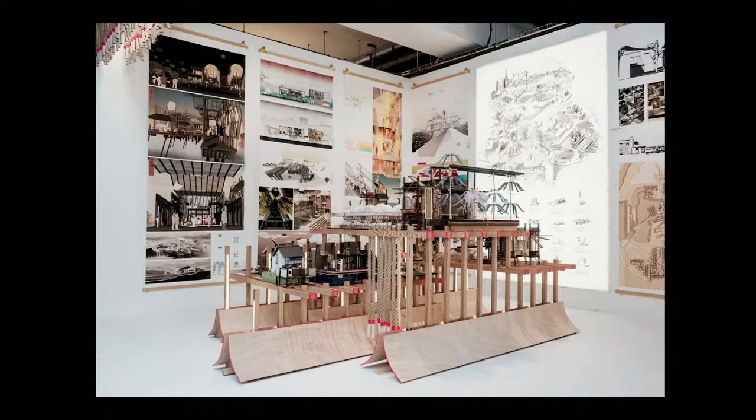With a nice attire, as long as you look professional, you know what I mean? No slippers, no short pants. I saw it before, but make it a proper attire and a proper gesture. Because it's not only your information from the board, from the slides, but your gesture - how you want to engage people into your design.

I heard students come here to make a presentation. You do your rehearsal, that's very good. Keep doing rehearsal. And when you do rehearsal, you know your timing - 5 minutes, I know it's too short, but if you can make it very precise with a good strategy, I can tell you, it's not about time controlling you, it's you controlling your time.

Do some sketches, because people love to see sketches nowadays. How you can portray your design by sketches, put some manual colors into it, because it's not only about digitalization, but people want to feel your soul, your pen, your ideas into your papers. Do some sketches, because people love to see the value from your design.

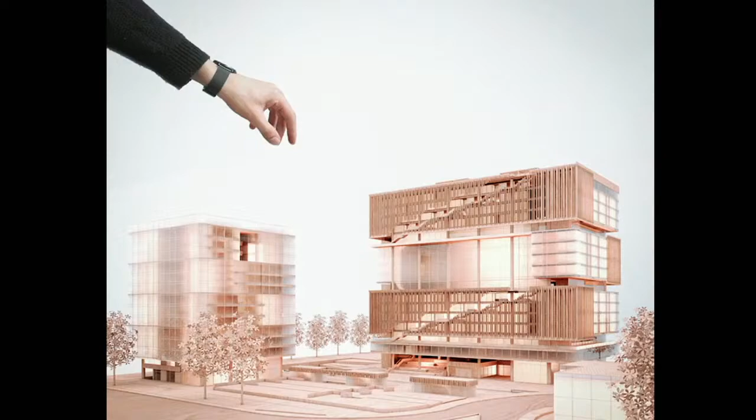Models - unfortunately we don't see models today. Maybe hopefully next year you come back with the models. I love to do models, because models can give you the feel, your energy, your soul of your design into the models.

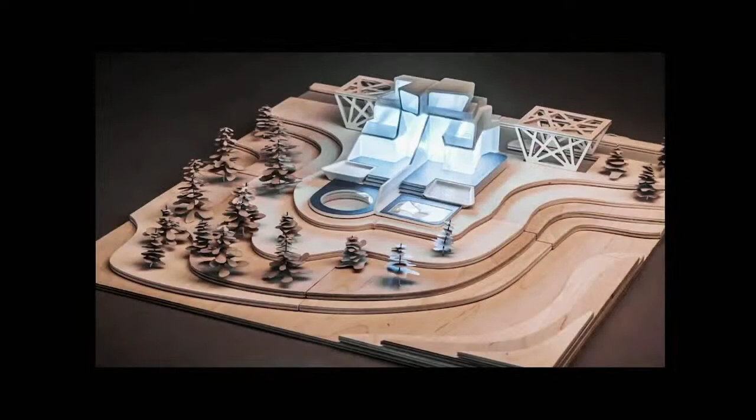Do conceptual models, study models, because models will give you more information further during your process. When you start to do models, it will make the process easier, from site models, individual models, to relate with the site environment. If you can make innovation of your models, put some lighting within them, because models will give you a positive chi, positive energy into your design process.

When you have models, you can start to speak to yourself and discuss with your friend, and somehow or other you can create a smile into your design. Talking and discussing with your friends, with your lecturers, with the models.

Even I'm also doing models, I love to do models. When I start to do models, when I start to present to my client, definitely he will understand and feel the design from the models.

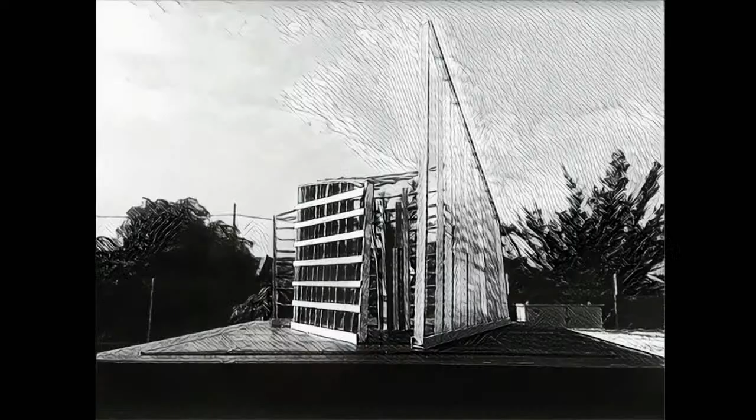And then, starting from models, you can use your software digitalization into your animation. And the model will give you the illumination into your design. Sometimes models - this is one of my projects doing sculptures - models would give you an energy to move forward.

To portray a design into scale 1:1, starting from the sketch, and then you can create models as a simple structure, and then make it scale 1:1, easy for us to explain to the contractors who want to build the models. This is one of the experiences when you do recycled materials, structure, lighting sculpture, and give illumination and the experience to people, to create memories to be remembered when you create a space for them.

So, enjoy your journey, enjoy your process, and somehow or other the satisfaction value will happen, and this is the one that you create your signature.

Today, juries and myself can see all the 10 finalists will be example for all future architects to build your personal brand.

And then you start to ask yourself how you see yourself and how others see you. This is about creating your brand identity. When you create your brand identity, then it can identify what kind of architect you are.